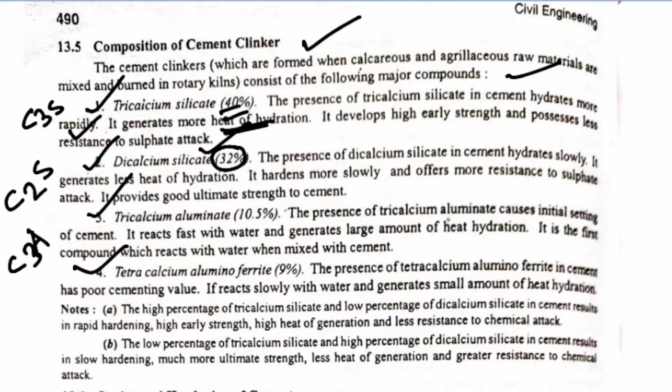Dicalcium silicate remains 32% in cement. The presence of dicalcium silicate in cement hydrates slowly. It generates less heat of hydration. It hardens more slowly and offers more resistance to sulfate attack. It provides good ultimate strength of cement.

Tricalcium aluminate remains 10.5% in cement. The presence of tricalcium aluminate causes initial setting of cement. C3A gives the initial setting time of cement, meaning it sets the cement quickly. It reacts fast with water and generates a large amount of heat of hydration. It is the first compound which reacts with water when mixed with cement.

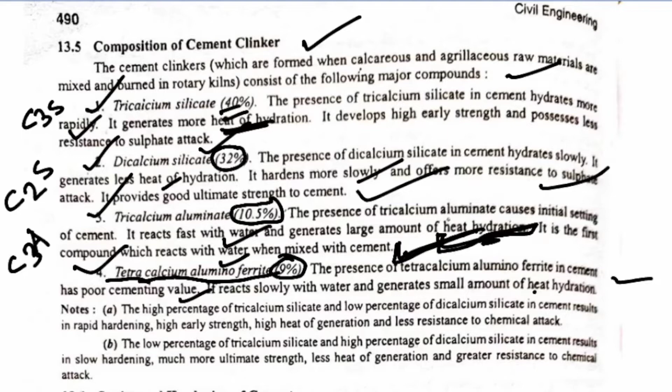Setting and hardening of cement. The chemical reaction between cement and water is called hydration of cement, or simply cement hydration.

The phenomenon by virtue of which the plastic cement changes into a solid mass is known as setting of cement. The phenomenon by virtue of which the cement paste sets and develops strength is known as hardening of cement. Very important.

The rate of setting and hardening of cement, the rate of evolution of heat, and resistance to sulfate attack are affected by the proportion of different cement compounds.

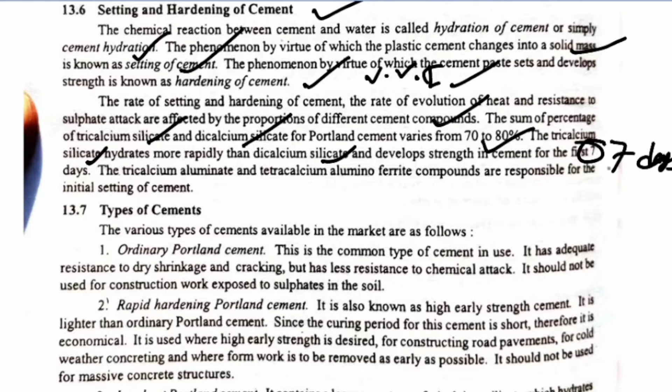The tricalcium aluminate and tetracalcium aluminoferrite compounds are responsible for the initial setting of cement.

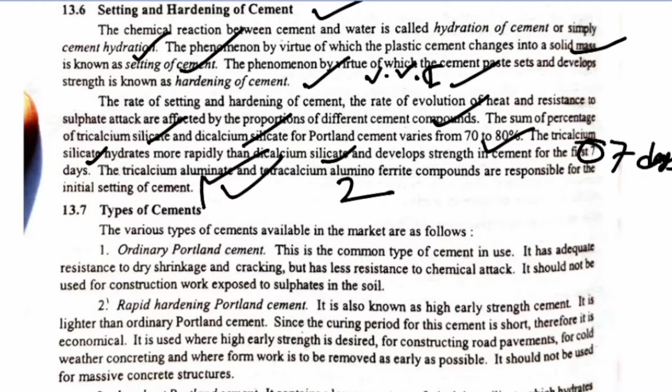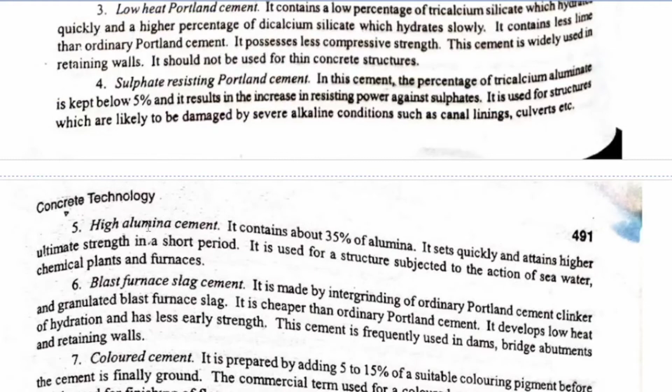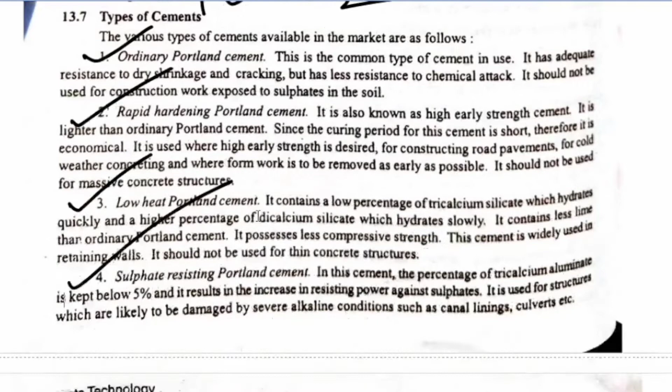Types of cement. The various types of cements available in the market are as follows: Ordinary Portland cement, rapid hardening cement, low heat Portland cement, sulfate resisting Portland cement, high alumina cement, blast furnace slag cement, colored cement, pozzolana cement.

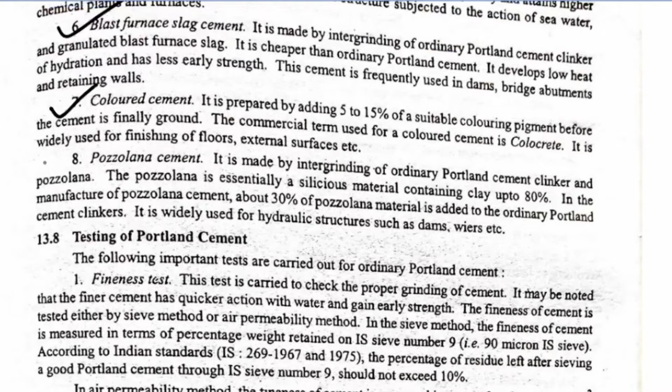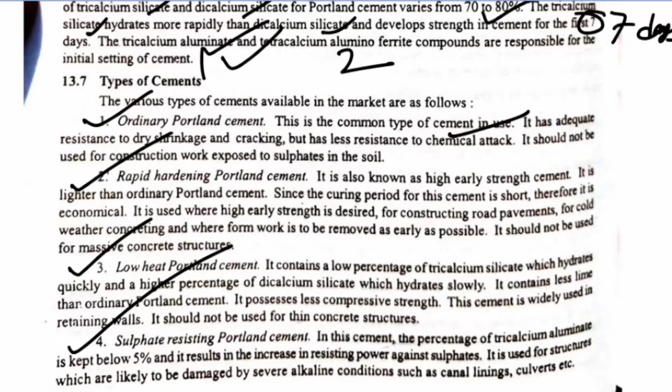Ordinary Portland cement (OPC) is the common type of cement in use. It has adequate resistance to dry shrinkage and cracking, but has less resistance to chemical attack. It should not be used for construction work exposed to sulfate in soil.

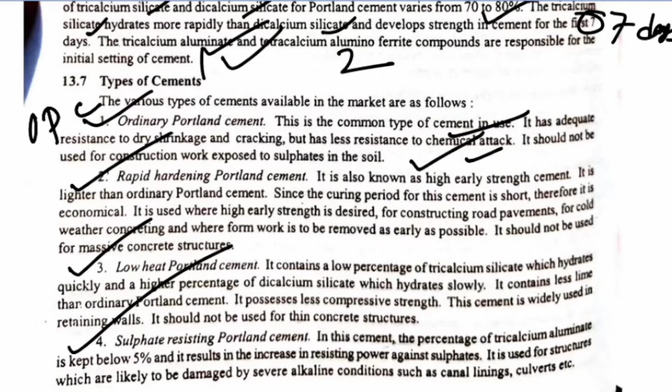Rapid hardening Portland cement is also known as high early strength cement. It is lighter than ordinary Portland cement. Since the curing period for this cement is short, therefore it is economical. It is used where high early strength is required, for constructing roads, road pavements, for cold weather concreting, and where formwork is to be removed as early as possible. It should not be used for massive concrete structures.

Low heat Portland cement contains a low percentage of tricalcium silicate which hydrates quickly, and a higher percentage of dicalcium silicate which hydrates slowly. It contains less lime than ordinary Portland cement and possesses less compressive strength. This cement is widely used in retaining walls. It should not be used for thin concrete structures.

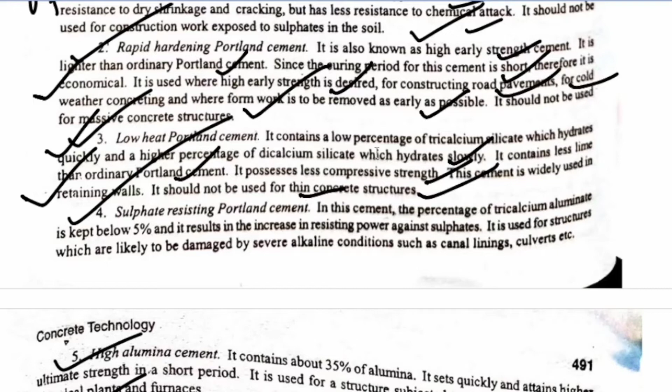Sulfate resisting Portland cement: in this cement, the percentage of tricalcium aluminate is kept below 5%, and it results in an increase in resisting power against sulfates. It is used for structures which are likely to be damaged by severe alkaline conditions, such as canal lining, culverts, etc.

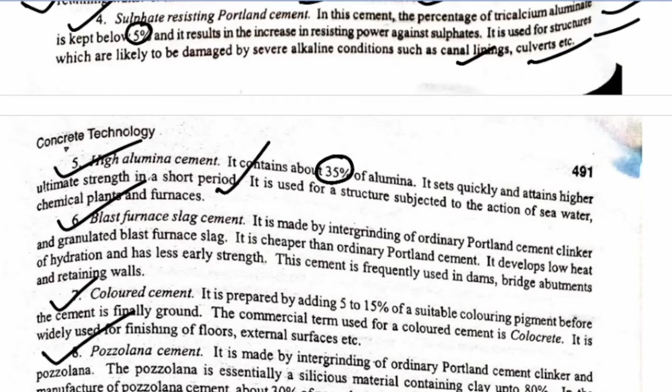High alumina cement contains about 35% alumina. It sets quickly and attains higher ultimate strength in a short period. It is used for structures subjected to the action of seawater, chemical plants and furnaces.

Blast furnace slag cement is made by intergrinding ordinary Portland cement clinker and granulated blast furnace slag. It is cheaper than ordinary Portland cement. It develops low heat of hydration and has less early strength.

This cement is frequently used in dams, bridge abutments, and retaining walls.

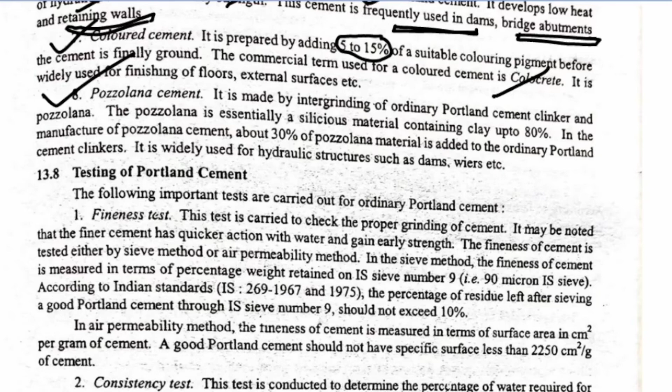Colored cement is prepared by adding 5 to 15% of suitable coloring pigments before the cement is finally ground. The commercial term used for colored cement is colocrete. It is widely used for finishing of floors, external surfaces, etc.

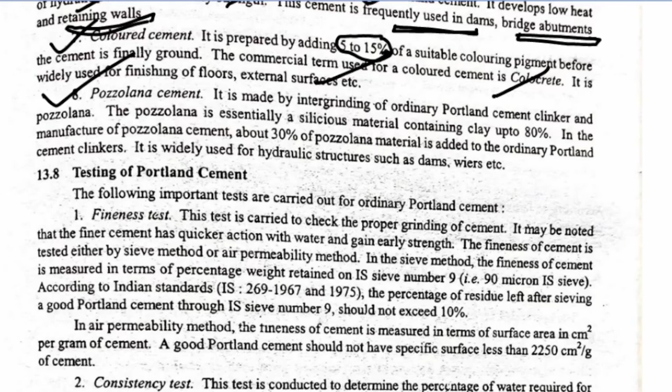Pozzolana cement is made by intergrinding ordinary Portland cement clinker and pozzolana. The pozzolana is essentially a siliceous material containing clay up to 80%. In the manufacture of pozzolana cement, about 30% of pozzolana material is added to the ordinary Portland cement clinkers.

It is widely used for hydraulic structures such as dams, weirs, etc.